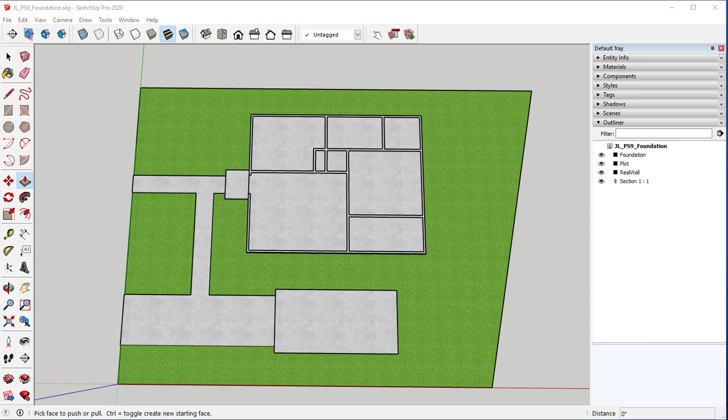In our first two videos, we worked through the plan set and created the plot plan. In the second video, we created the foundation, which ended up looking like this with all of our foundation footings, even the ones for the interior walls.

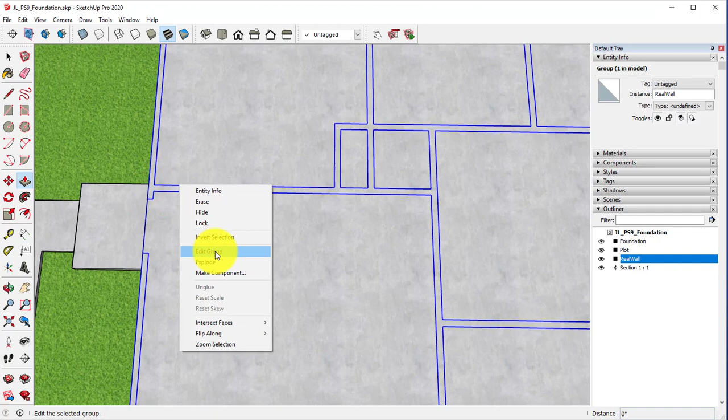In this video, this is what we are going to create: all of our walls for the house. If I edit the group, you'll see that this is what it's going to come out with. So this is what we're going to create today, and in our next video we'll go in there and start putting in all of the locations for the doors and windows. We're going to separate the two, as this one will probably get us into about the 15-20 minute mark.

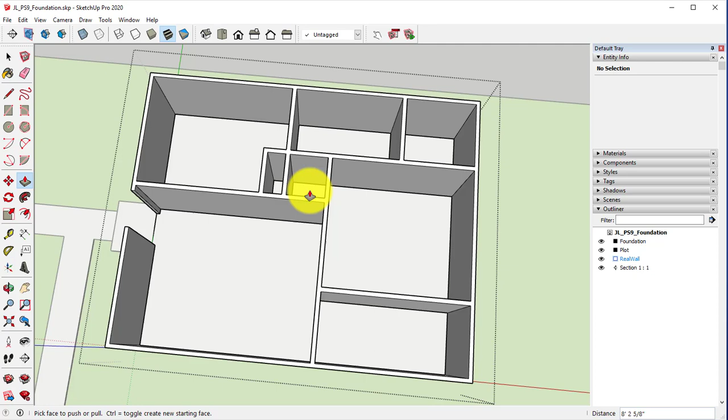So go ahead and hide this one, and this is what we're going to start off with. For the measurements, the exterior wall we're going to create at 4 inches. All of our interior walls we're going to create at 4.5 inches.

The main reason is that there are two different methods you can use whenever working in SketchUp. You can create all of your pieces for the construction part of it, so our walls would be 3.5 inches, or 5.5 inches if we're using 2x6s, etc. They're built for all the framing and stuff.

On the other hand, we can create it for more interior design, so that the interior design part is accurate, and that's what we're going to do for this case.

So our exterior walls go right up to the edge of the foundation. We have our 2x4, which is what the wall's made up of, and then on the interior we have that half inch of drywall. That's why we got 4 inches for the exterior walls. For the interior walls, we're going to have drywall on each side, so that's why we got the 4.5 inches.

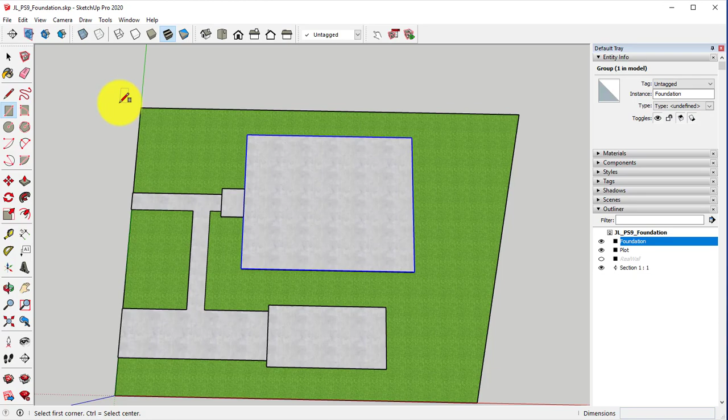Okay. So for this, I want to go ahead and create a rectangle on top of my foundation. It's going to shimmer like this. Anytime you see any kind of face shimmering like this, that means that you have a group or a face on top of another group.

We're not going to really worry about that because we're not keeping anything anyways. We're simply just going to create the walls, and we're going to delete all the other faces on this eventually. So this group is strictly going to be the wall group.

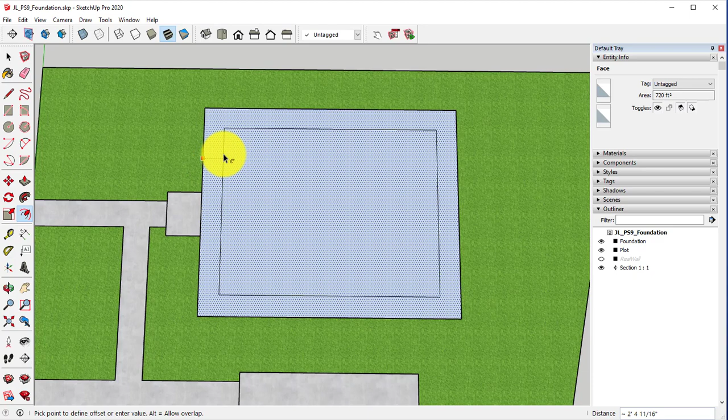Go ahead and do the offset, and our offset is going to be 4 inches. So 4, enter.

At this point, whenever we're doing all of our measurements and creating all of our guides, we're going to go in here and go from the exterior. Make sure that you're going in and doing all your measurements from the exterior edge, not the interior part of the wall. Just for your reference.

We are also just going to do the center lines of our walls to begin with, and then we'll go in there and create all of our actual walls. So the lines we're creating now are the center of all of our walls.

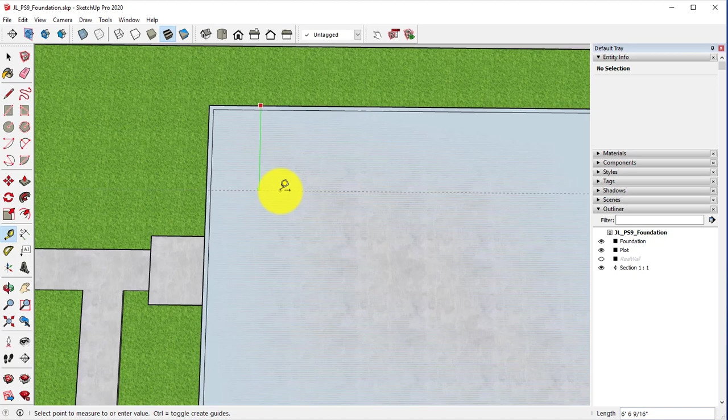So our first mark is going down, and it is going to be 10 feet 3 inches. From this way, again, our front door is over here. So going this way, it is 13 feet 3 inches.

We're going to create one from that mark going over 10 feet. And if you did it correctly, this point to the outside edge should be 6 feet 9 inches.

As we go, we want to constantly double check our measurements to make sure that everything is correct, so that we're not going to the very end and finding that nothing is lining up. So this very last one should line up with 6 feet 9 inches. We want to go from the top edge down and create another one at 6 feet 3 inches.

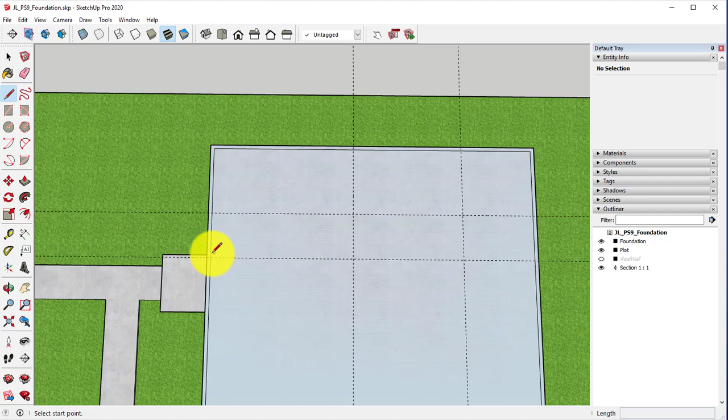At this point, I want to go ahead and draw out my lines. So I want to draw a line from here to here, from there to there, from here all the way across, and right there. I'm then going to erase these lines.

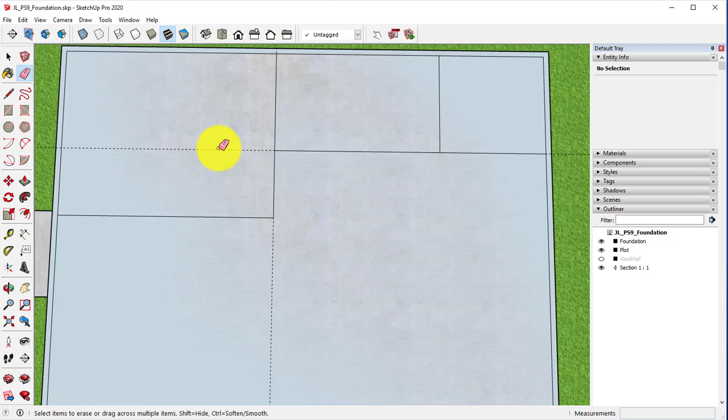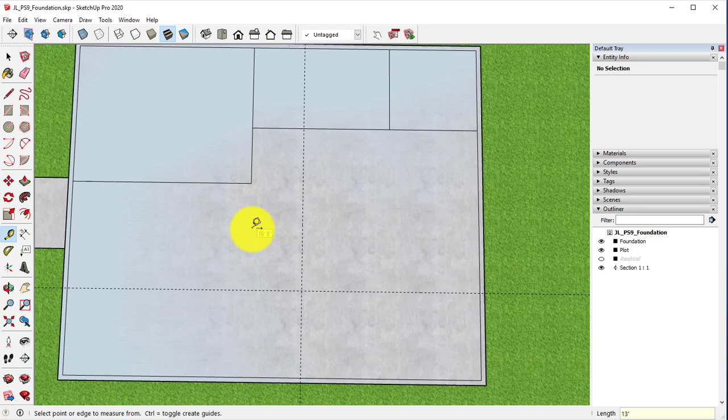Our next one is going from the very bottom, going up 6 feet 3 inches, and going from the far right, going over 13 feet. So we'll draw a line here, and drawing a line there.

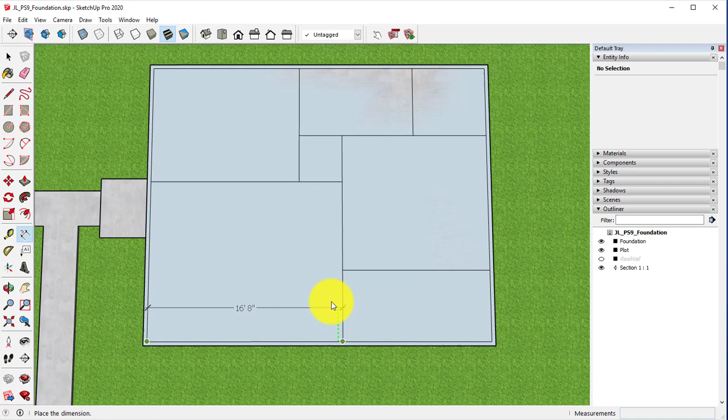So this is what we should end up with. Just to make sure that you have everything correct, let me give you some measurements.

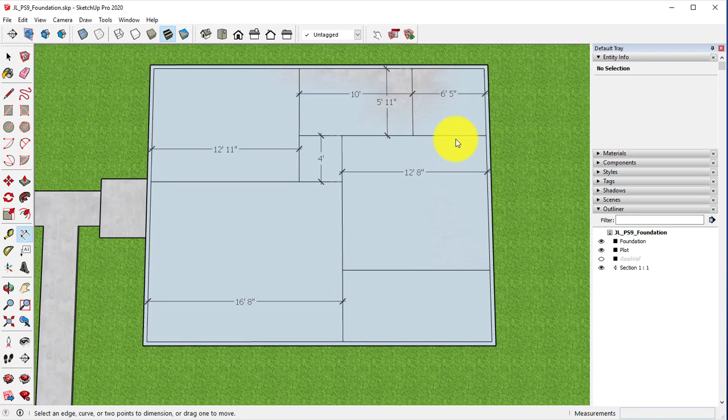Hopefully that helps you out when it comes to making sure all your measurements are correct.

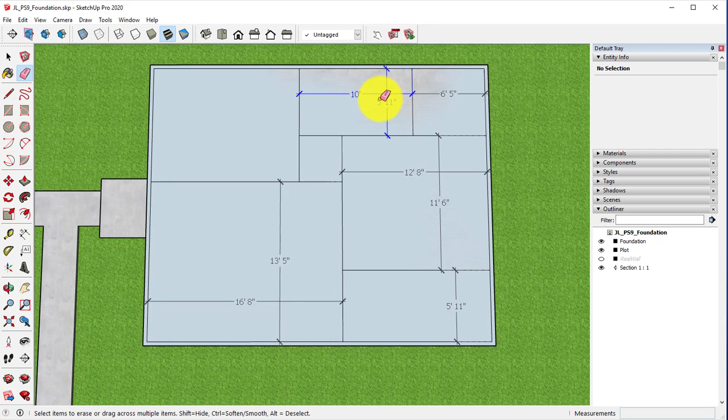At this point, we have all of our center points of our walls. Now we're going to create the actual wall. Remember that all of our interior walls are going to be 4.5 inches. Take your tape measure and go on each side of the line.

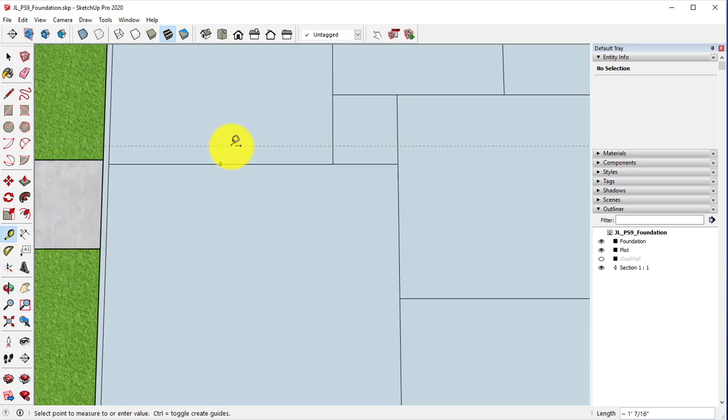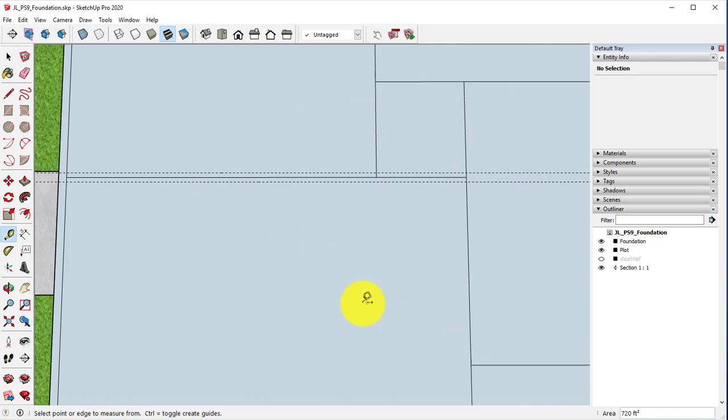2.25 inches on each side, and if we double check, our overall width is 4.5 inches - 3.5 inches for the stud, half an inch for drywall on each side. We'll do that for all of our lines.

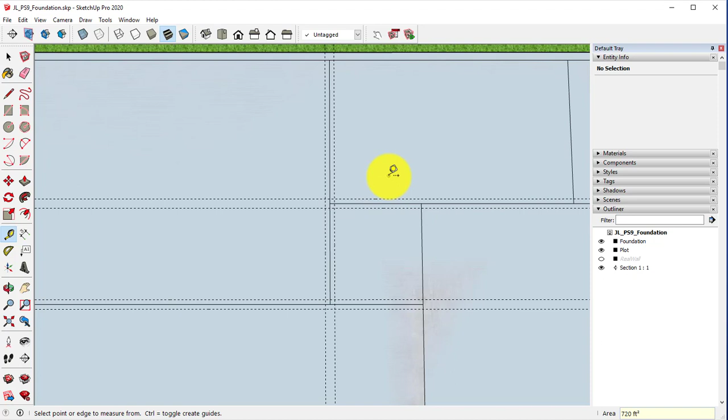There are a couple different ways you can do this. You could use the offset tool, but then you'd have to go erase lines and fix things, so it would really be a wash time-wise. It's however you feel like doing things.

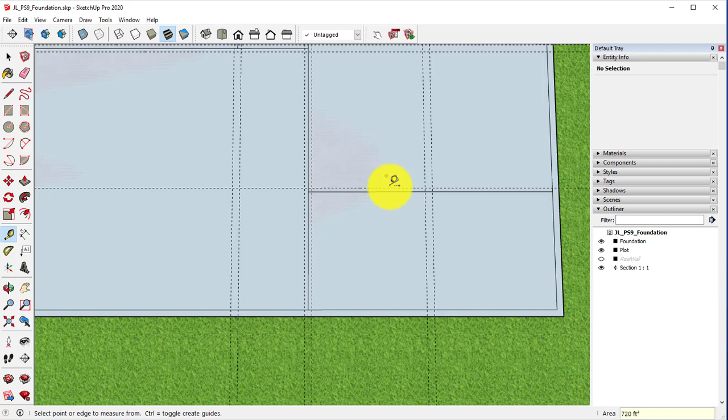I tend to always use the tape measure and lay out all my guides for everything, instead of using the offset tool and then correcting all my lines. Just so you're aware, there are multiple ways to go about doing things.

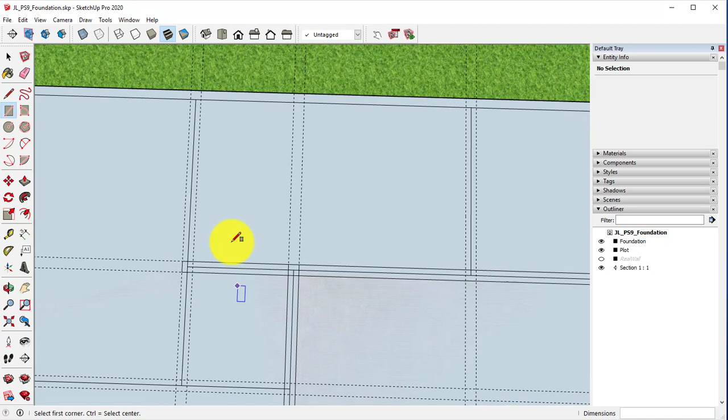Come in here, take the rectangle tool, and now we're just connecting all of our dots. We'll come back into this after we create all our rectangles and walls, and actually fix and erase all our lines.

Make sure all the rectangles are hitting all the corners so you're completely accurate. A lot of times you'll need to zoom in a lot to make sure everything is correct. This is what you'll see after doing all of that.

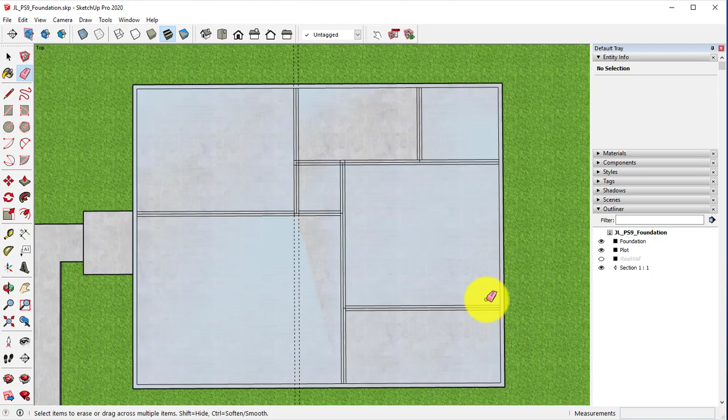Come in here, we can delete all of our guides really quick, and then delete all of our interior lines for our walls. That way our walls are one solid piece, one solid group.

So if I go in here to raise the walls up to 8 feet, 9 feet, whatever it may be, they'll all come up at one time.

We will not be raising the walls up in this video, as we want to make sure we create all the openings or locations for where our windows and doors will be. So the walls will stay flat for this video.

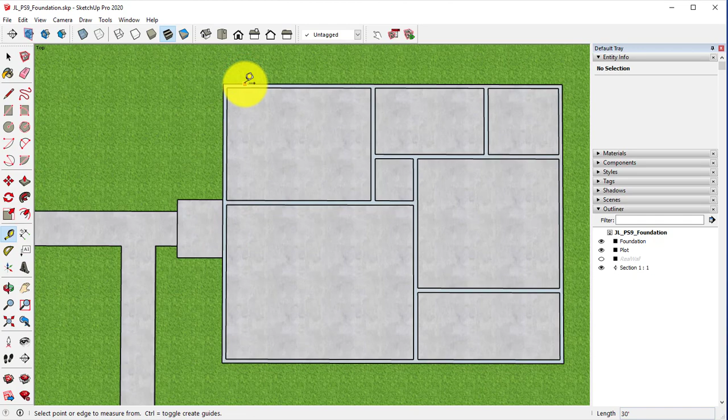At this point, I'm going to click and delete the interior parts of this so they're not there. In our last bit, we're going to create where the front door is going to be at. Take my tape measure, click on the far outside edge, and find the center point of our front door.

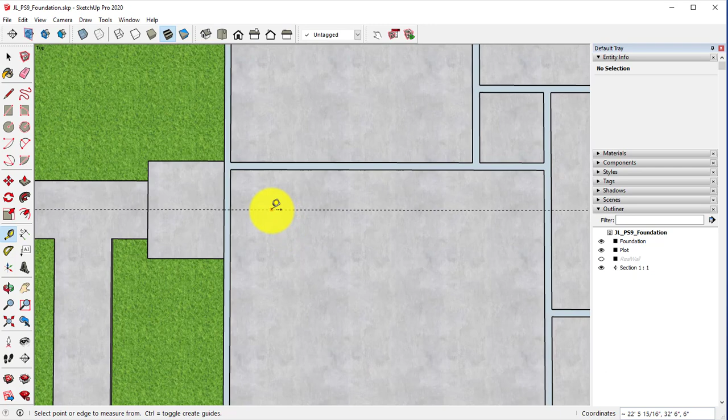Our front door is 3 feet wide. In this project we know exactly the makeup of all our doors, windows, and everything, because we have the schedules for it - that's something we'll get into later on. But for now, our door is 3 feet wide.

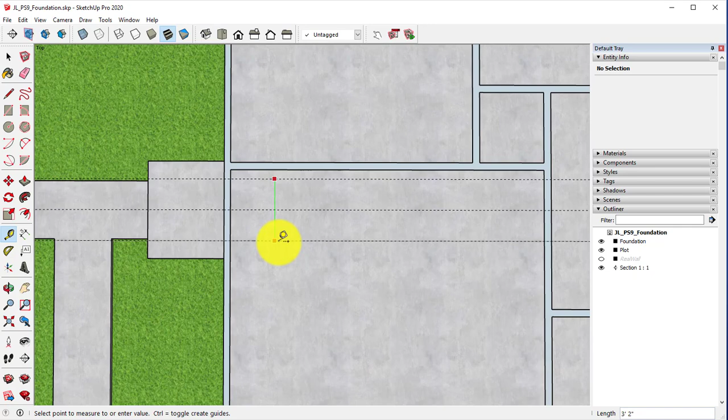We are going to create our rough opening for our front door, so we want to add an inch on each side. We're going to go 1 foot 7 inches on each side, giving us an overall width of 3 foot 2 inches - an inch on each side for the rough opening, so we fit our door as well as all the trim.

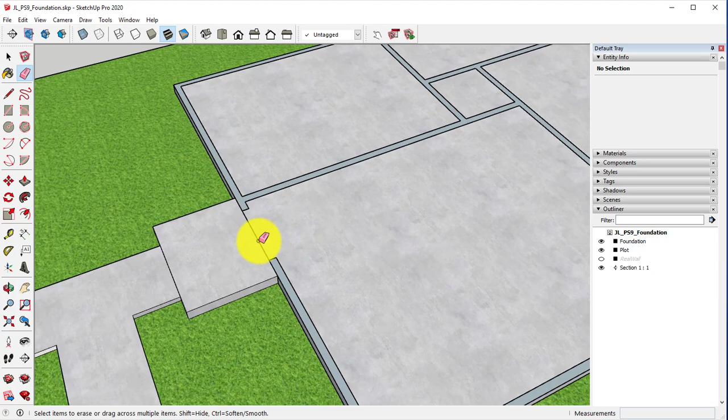Using the rectangle tool, connect our dots, and we want to erase this right line. If you erase this line, you'll erase the whole entire thing, so we'll just leave that alone right there.

At this point, let's triple click on our wall, right click, make it a group, right click on the group, rename it, and name it wall.

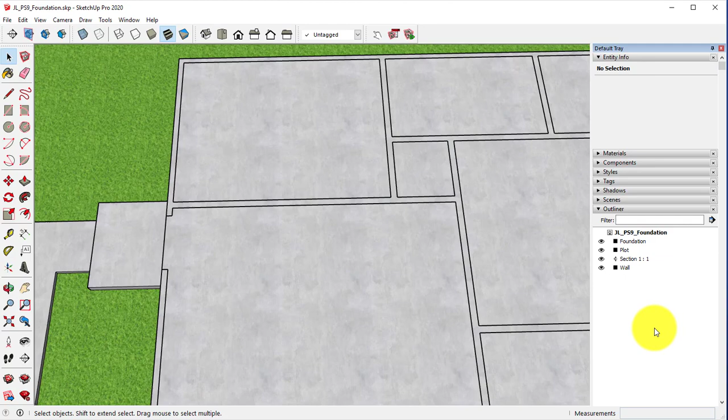You'll know you did it correctly when we take our push-pull tool. I'm going to edit the group, and you can pull it up like this.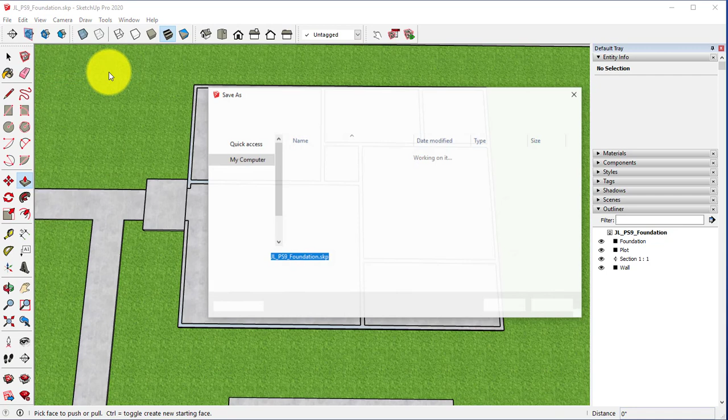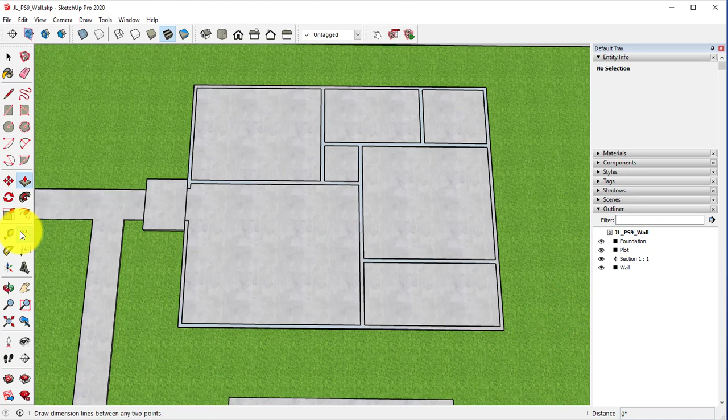Make sure that when you're taking your screenshots, you have your outliner panel open with all of our groups, and also come in here and create some dimensions - not necessarily for the walls themselves, just a few of our major rooms.